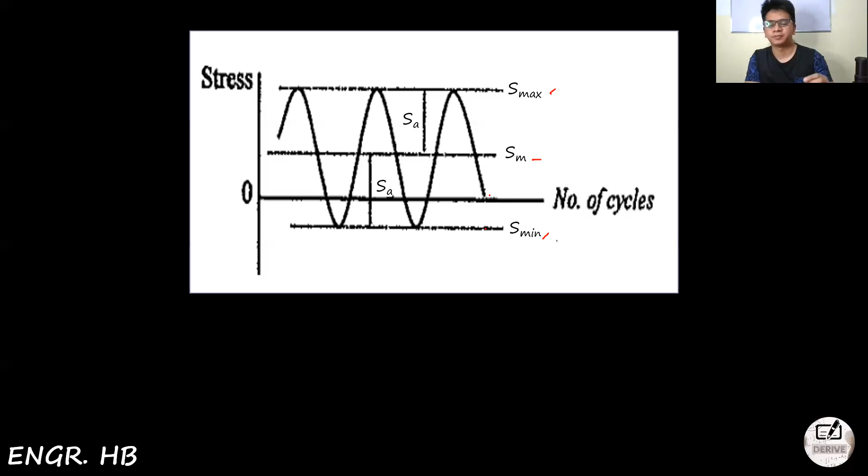All of these have their own formulas. SM is equal to S max plus S min divided by 2, which is the mean or average stress. SA is simply the difference of the maximum and minimum stress divided by 2, which is the alternating stress.

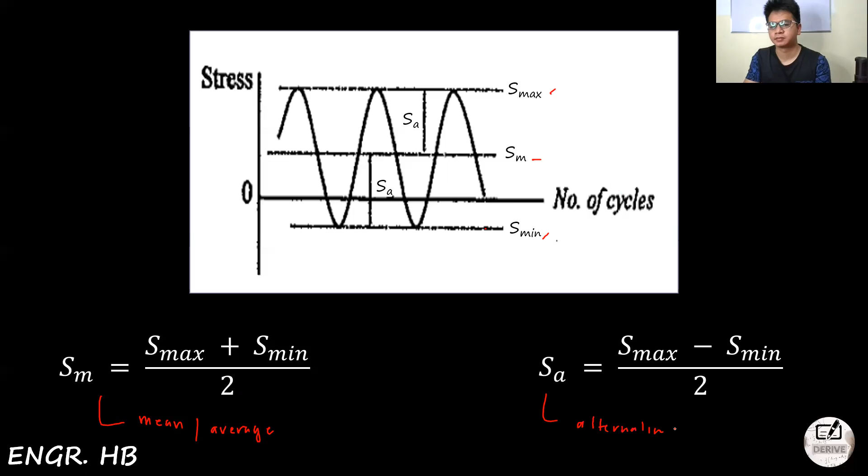We have a line here showing the line of failure versus the line of safe stresses. The axis depends on the alternate stress and the minimum or mean stress. If we have a safe stress, we also have a line of failure, defined by Soderberg, that's why it's called the Soderberg line.

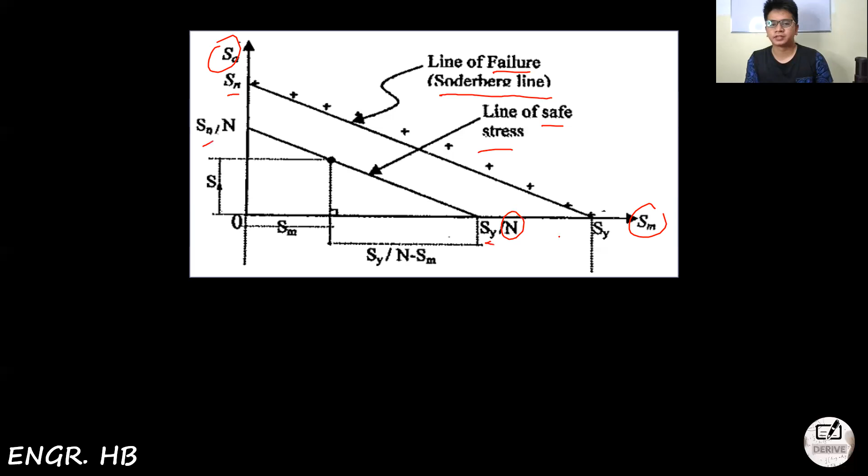As you can see, all the parameters here should be familiar, which has SA, SN stands for endurance strength, SY is the yield stress, and of course, the letter N designates or represents the factor of safety. The factor of safety has its own formula, but before I show it, this graph shows points of failure of a tested ductile specimen with mean and alternating stress values.

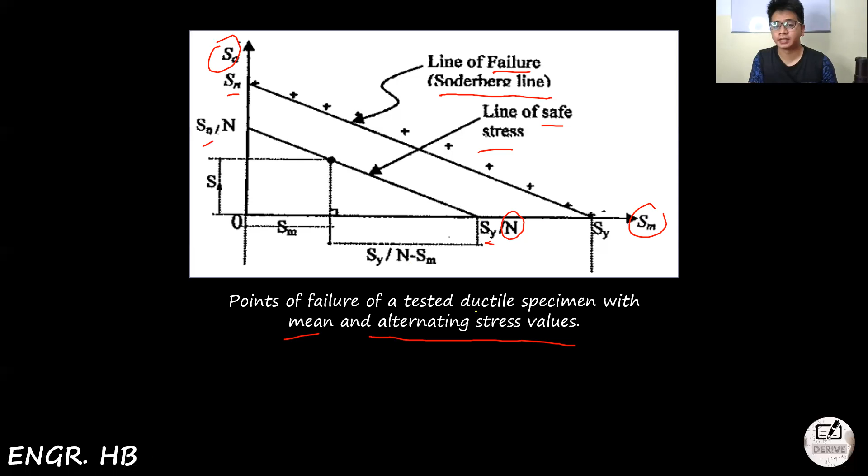This was your X and Y axis from earlier. Let me change that. So that was the X and Y axis. And of course, it has SY because the specimen is ductile-based.

Showing the formula for the factor of safety, we have 1 over N is equal to SM divided by SY plus KF times SA over SN. In order for you to remember it easily, guys, 1 over N is equal to stress. Put a 4 there, so put M-A-N-Y, that stands for 'many' stresses. Just read it around and it becomes 'many': SM, SA, SN, and SY, so it's easy to remember.

And put some strength reduction factor here, which is the KF, which has its own formula to be discussed later. This equation is called the Soderberg equation, and of course, SY applies when the material is ductile.

And of course, if there's ductile, there's also brittle. The equation is 1 over N is equal to SM divided by SU plus KF times SA divided by SN. It's almost the same, so just write 'manu' instead, M-A-N-U. If your ductile material is 'many,' this one is 'manu.' This formula is called Goodman's equation.

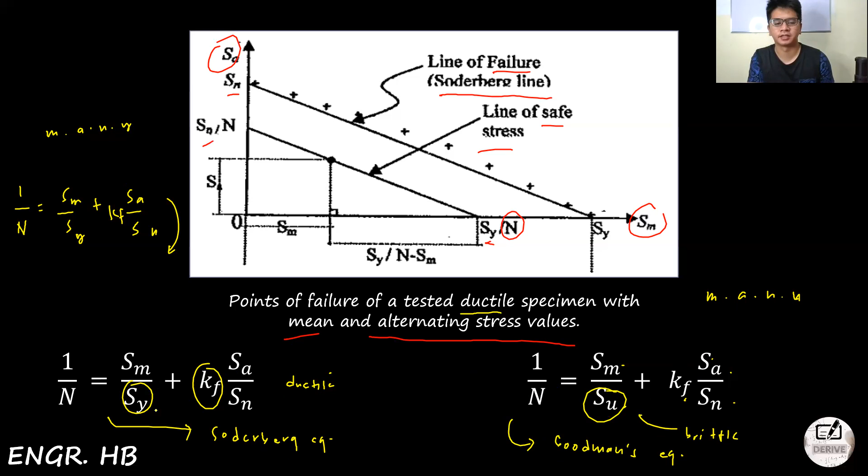Which is based on brittle materials. So it's easy to remember: Goodman's is for brittle, that's why it uses SU, the ultimate strength, and the Soderberg equation is for ductile materials, that's why it's SY or yield stress.

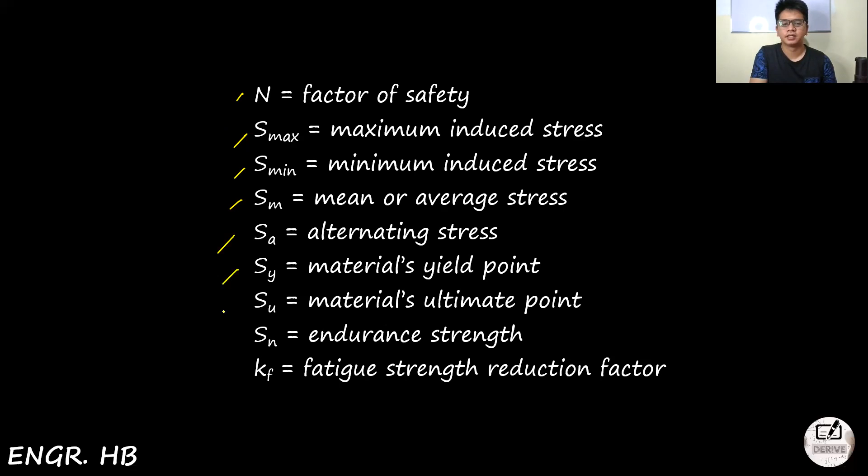So the designations are: factor of safety N, S max is maximum stress, S min is minimum stress, SM is the average stress, SA is the alternating stress, SY is the yield point, SU is the ultimate point, SN is the endurance strength, and KF is the fatigue strength reduction factor.

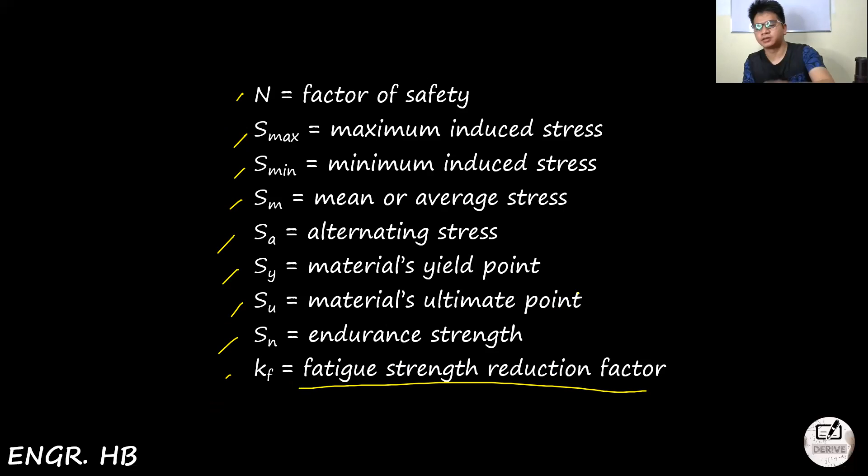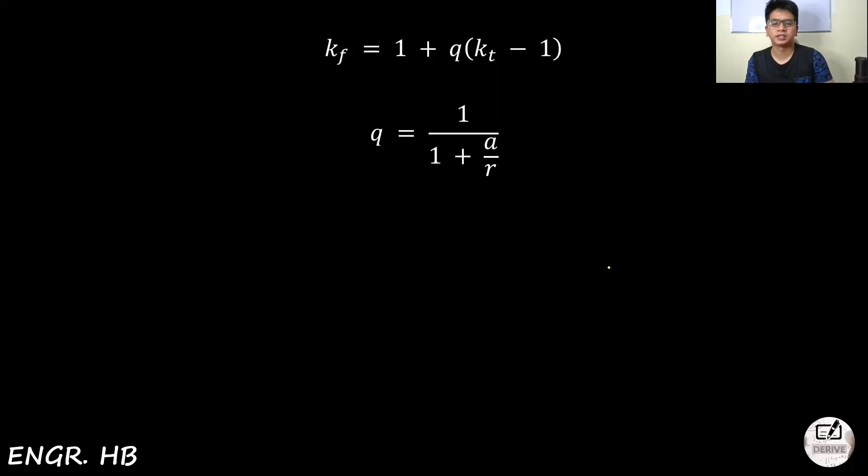This fatigue strength reduction factor has a formula: KF is equal to 1 plus Q times KT minus 1. So what are those parameters? We have Q is equal to 1 divided by 1 plus A over R. What are A, R, and Q? KF is the strength reduction factor, KT is our stress concentration factor, Q is the notch sensitivity factor, R is the radius of the stress raiser, and A is a constant dependent upon the ultimate strength.

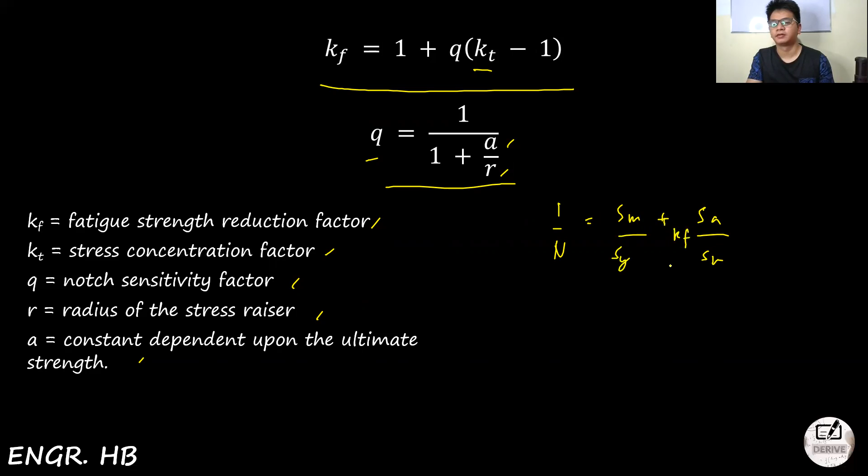Okay, so let's start with problem solving. Problem number 1: compute the alternate stress if the given maximum stress and minimum stress is 5,000 PSI and 12,500 PSI respectively.

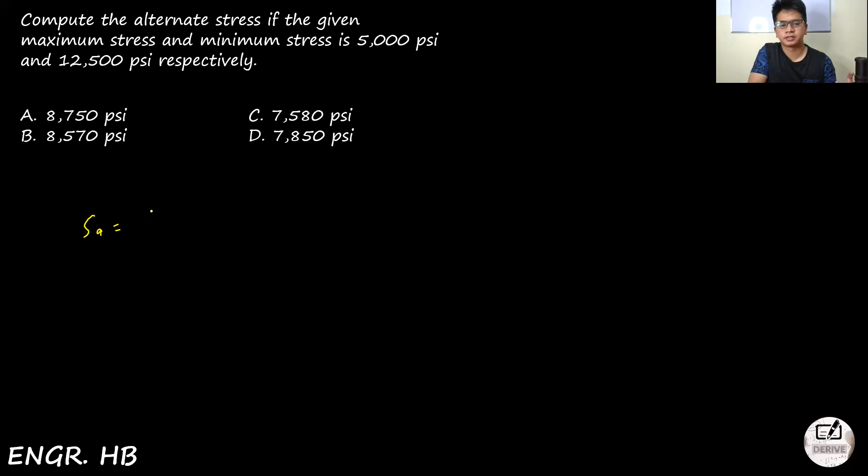Okay, so our SA is, we all know that the alternating stress is just the difference of S max and S min divided by 2. That is equal to 12,500 minus 5,000 divided by 2. So medyo mali yung grammar dito kasi ang maximum dapat is 12,500 PSI and the minimum should be 5,000 PSI. But don't worry, dalawa lang naman ang given. So that was 12.5 minus 5, that was 7,500 divided by 2. So the answer is 3,750 PSI.

Okay, so walang answer. So maybe this figure should be 3 kasi may 750. Pero nangyayari uli yan sa mga board exam problems, especially in machine design. Just tell your proctor, but I ensure you that the answer is 3,750 PSI. So baka na ano lang dito, dapat instead of 8, that is 3.

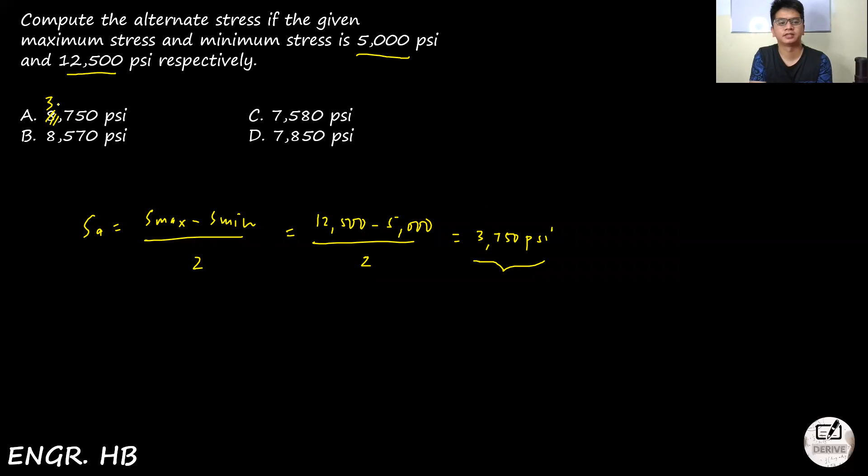Okay, proceed tayo. Second question. A link has an endurance strength of 28 KSI. Compute the alternating stress of the link if it is subjected to a reversing load. Assume a factor of safety of 3.

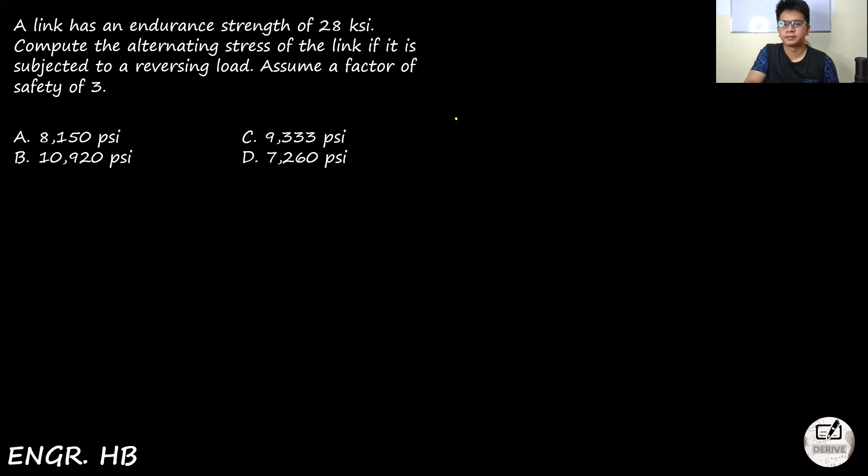So kung walang given or kung walang sinabi, just proceed immediately to a ductile material, which is Soderberg's equation. So we have the Soderberg's equation that is equal to 1 over N is equal to SM plus SA here. So meron tayong N dito and meron din tayong SY, so meron, M, A, and Y. Of course, meron ditong KF. So kapag walang given na KF, just assume it that is 1. And ang hinahanap natin is the alternating stress, which is the SA.

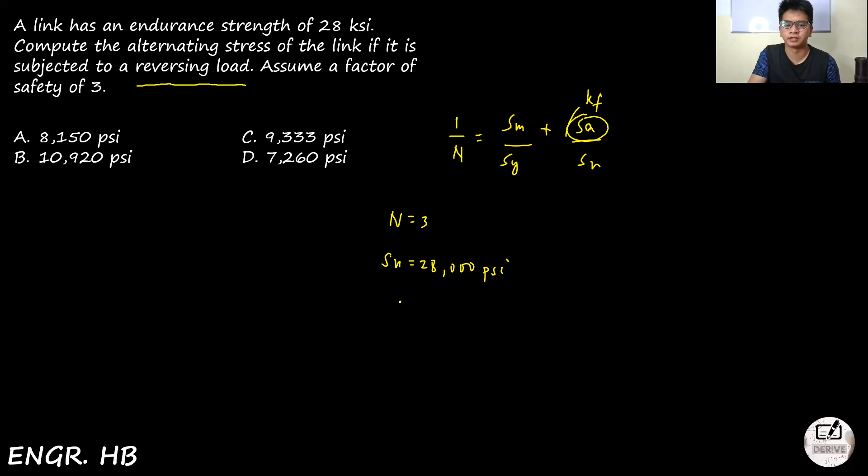So meron ba tayong given na factor of safety? So our factor of safety is 3. So our endurance strength or SN is 28 KSI or 28,000 PSI. So wala tayong SM and SY para malocate para mahanap yung SA, but meron tayong word dito na reversing load. And sa machine design, kapag sinabing reversing load, we all know that the mean or the average stress is 0. So matic, this term is 0. So our formula will become 1 over N is equal to KF times SA divided by SN.

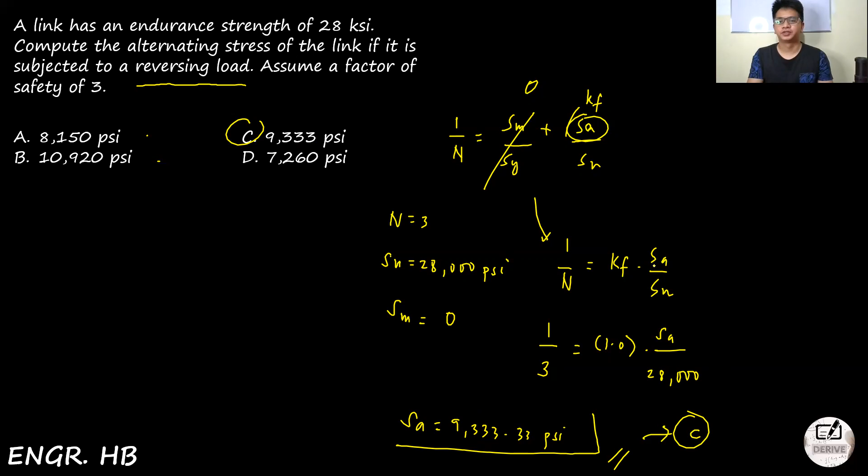So that will become 1 over 3 is equal to KF. So walang given, we may assume that 1.0 will do, times SA, which is yung hinahanap, divided by endurance strength, which is 28,000 PSI. So our SA will become 28,000 divided by 3, so that will become 9,333.33 PSI. So may sagot ba? 8, 150, 10, 920. Yun, 9333 PSI, so the answer is letter C. So ayun, buti naman nasa multiple choice yung answer.

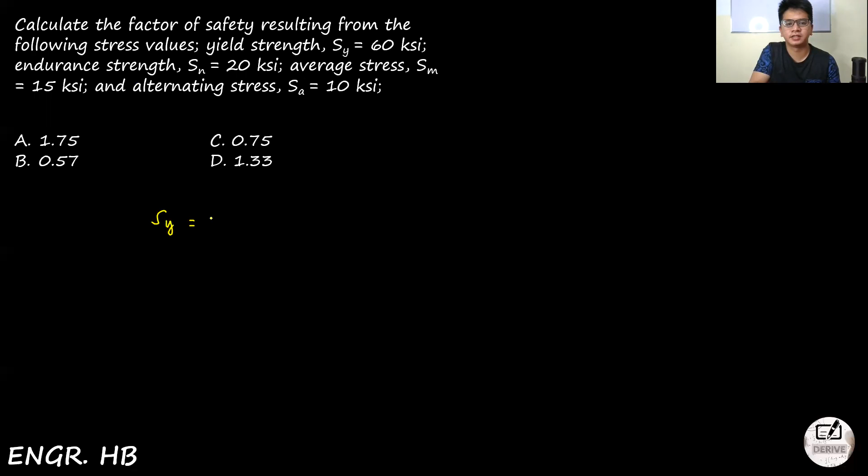So third question will be, calculate the factor of safety resulting from the following stress values. Yield strength, so following, pwede nating sulat isa-isa. Yield strength is 60 KSI. Endurance strength is 20 KSI. The average or the mean stress is 15 KSI. And the alternating stress is 10 KSI.

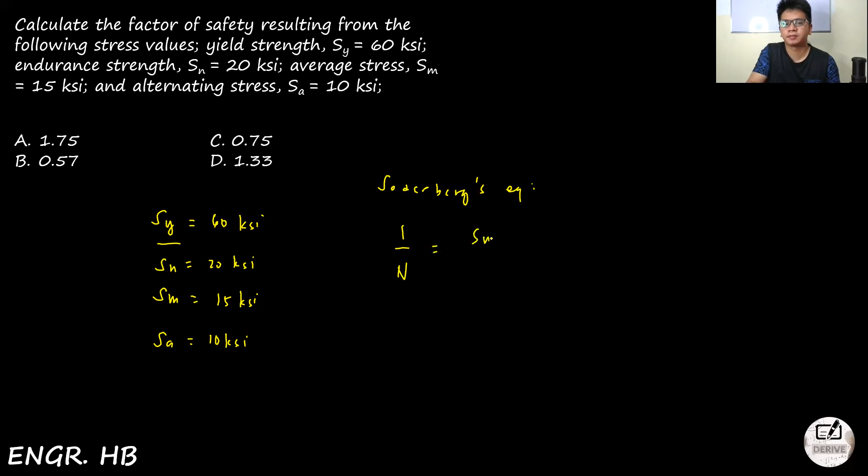So binigay is yield strength, etc. We are going to use the Soderberg's equation, which is equal to 1 over n is equal to SM plus SA dito, tapos may SN ka dito, and dito naman is SY. So meron, M, A, and Y. So put KF, kapag hindi given, you may assume that KF is 1.0 or the stress reduction factor. So ang hinahanap natin is, we're looking for the factor of safety. So I think it is a direct sub-problem. So 1 over n is equal to SM is 15 divided by yield strength of 60 plus SA of 10 and our SN is 20. So our N will become,

So 15 divided by 60 plus 10 over 20. So reciprocate mo yung answer, so that will become 1.33. So tingnan natin kung may answer. So A, 1.75, 0.57 sa B, 0.75 sa C, and our D is 1.33. So we have the answer, letter D.

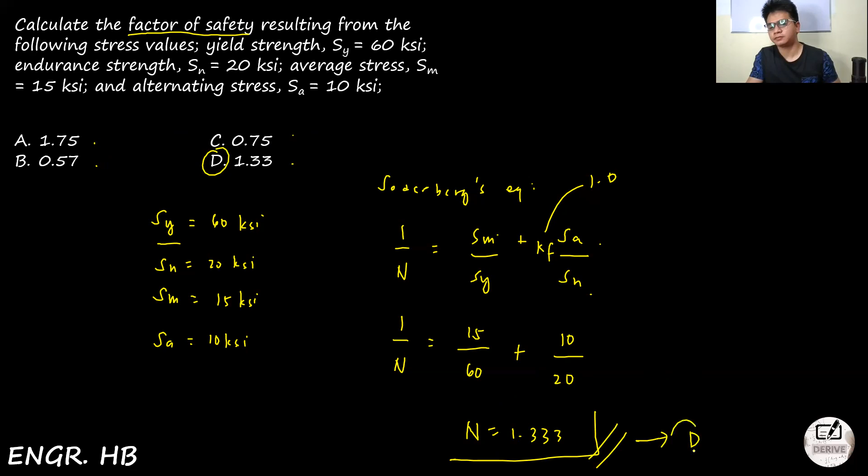So for the last item, a step shaft made of SAE 1117 steel with an ultimate strength of 69.7 KSI. The notch sensitivity factor is 0.983 and 0.00435 for the constant dependent upon the ultimate strength. Check the radius of the stress raiser.

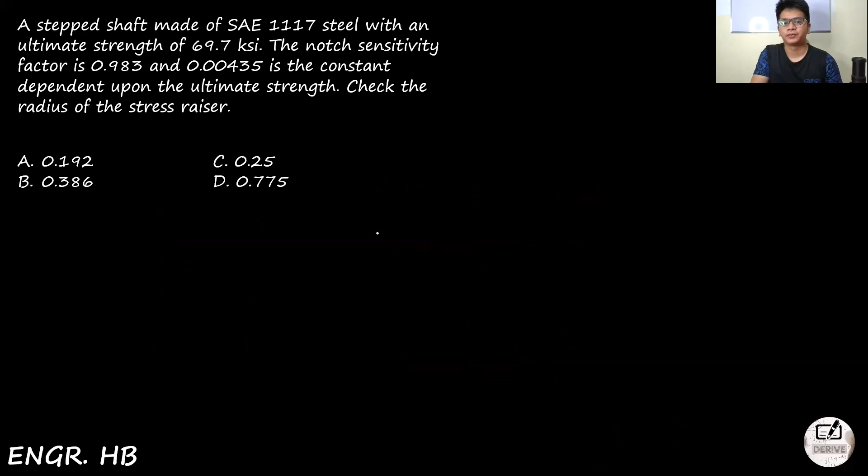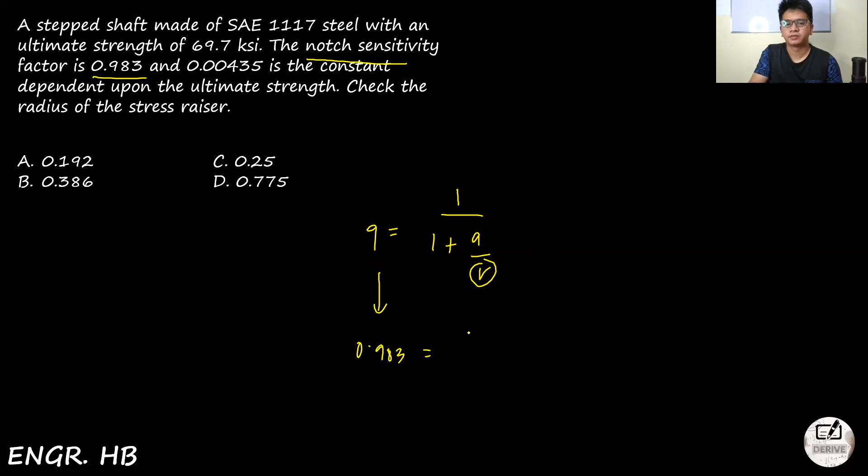We all know we have the formula way back on the previous slides that the notch sensitivity factor is equal to 1 over 1 plus A divided by R. Now, tingnan natin kung makukuha natin yung stress raiser, which is the R, based on this formula. Kung merong notch sensitivity factor, sabi, the notch sensitivity factor is 0.983. So that is 0.983 is equal to 1 over 1 plus. So meron ba tayong constant dependent? So meron, 0.00435 is the constant dependent upon the ultimate strength, which is 0.00435 divided by R. So dito pa lang pala, hindi na natin kailangan pansinin si ultimate strength of 69.7 KSI.

So we may find the amount of the stress raiser here. So R will become, so pwede yan, i-reciprocal mo muna. So 1 divided by 0.983 mo muna, tapos minusan mo na siya ng 1, and the answer ay divide mo sa 0.00435 or shift solve will do. So the answer for the radius of the stress raiser is 0.2515.

So tingnan natin kung may answer. A, 0.192, B, 0.386, and C, 0.25. So the answer will be C, 0.25.

Okay, so ayun, and guys, sana nakatulong ang mga previous board exam problems na aking inilagay dito at sinagutan. So ayun, nakapag-review na tayo ng varying stresses. So naka-review na rin tayo ng shear and the normal stresses way back on the previous videos, meron din tayong stress due to impact load, and this last stress is the varying stress.